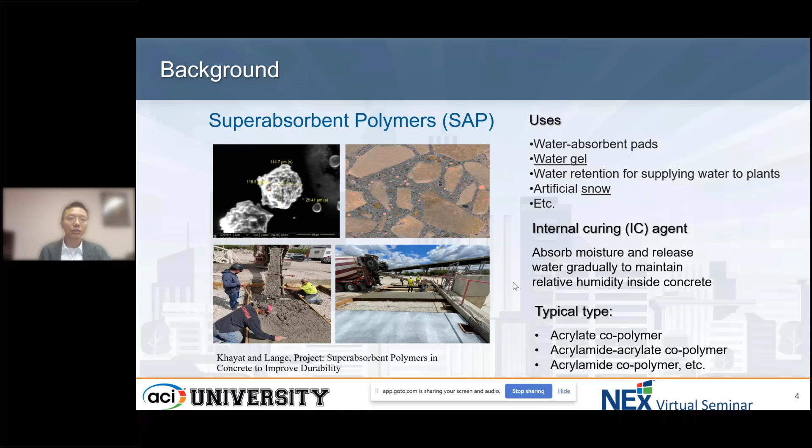Why do we use it in concrete? Because it can be used in concrete as an internal curing agent. It absorbs moisture inside concrete when it is in fresh state and releases the water gradually to sustain the relative humidity inside the concrete when it gets hardened. In this way, it can significantly reduce the shrinkage of the concrete, and we all know the shrinkage of concrete is a very big problem. It induces cracking and thence reduces the strength and durability of the concrete.

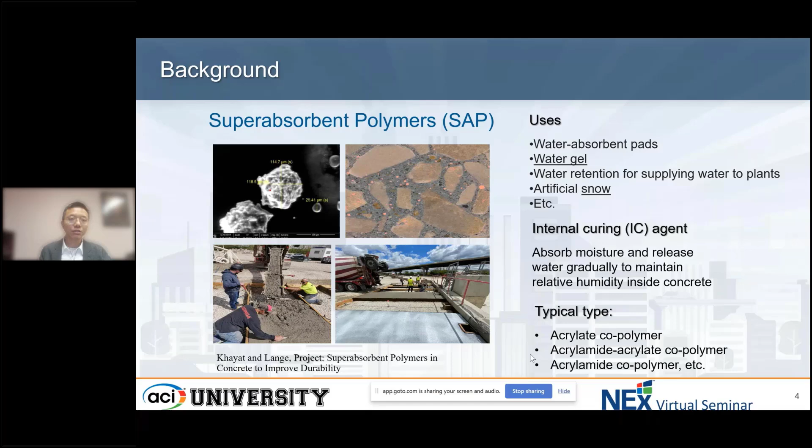This photo shows a project where we used SAP in pavement concrete, and it did a good job reducing the shrinkage. So in the past 5 years, researchers started using SAP in 3D printing concrete. Why do we use it? Because for 3D concrete printing, it has a high volume of binder, it does not require formwork, and it also has a high surface-to-volume ratio of filament. So drying and cracking in 3D concrete printing is really a big problem, and it can lead to reduced transport properties and durability. So researchers started using SAP in 3D concrete printing to solve this problem.

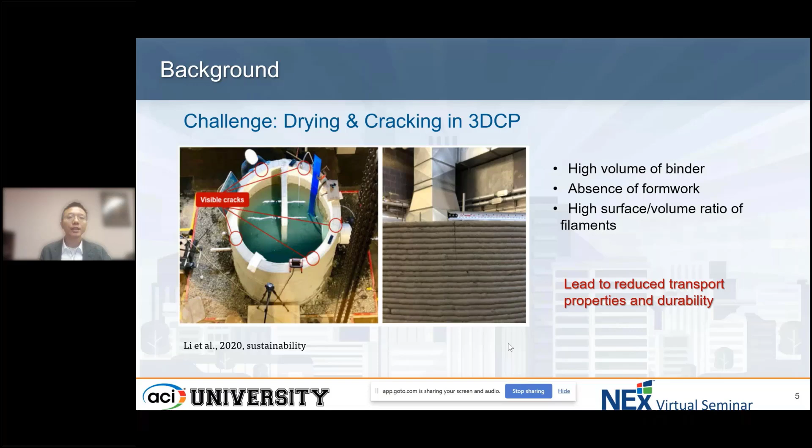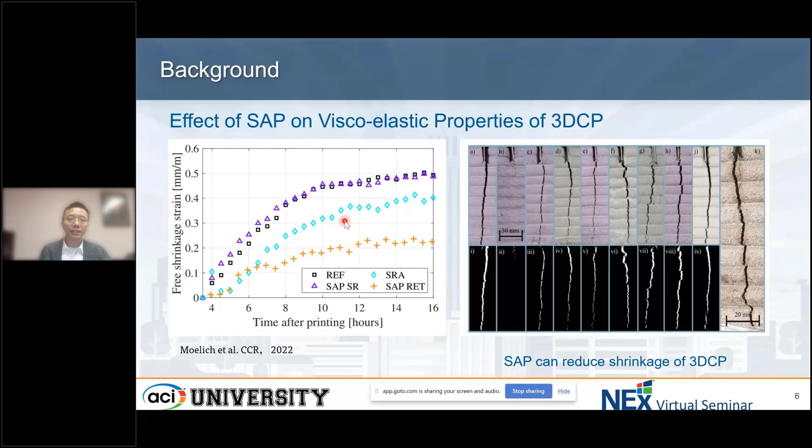But as it brings some advantages on reducing shrinkage, it also introduces a very big problem in 3D concrete printing. We all know that we need the printing concrete to be flowable when we pump it and when we extrude it, but after extruding the concrete, we need it to become hardened as soon as possible. As SAP absorbs and desorbs water during mixing, it definitely will affect the workability and rheological properties of concrete. So this became a big problem, and also a challenge, but a challenge usually means opportunity.

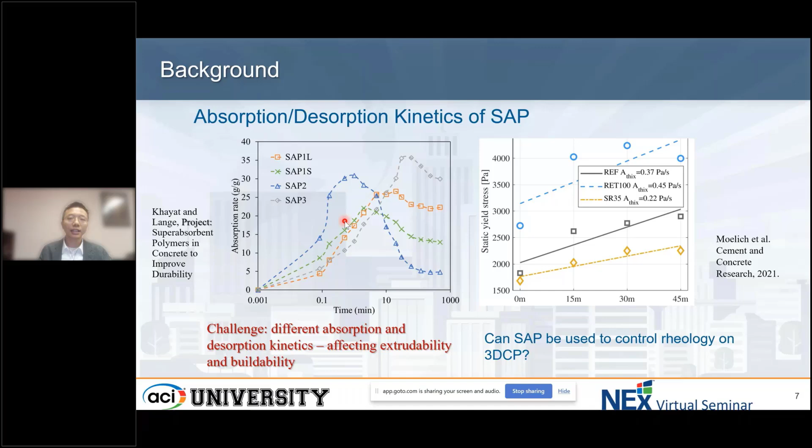Another idea in the recent 2 or 3 years is: can we use this characteristic of SAP to control the rheology in 3D concrete printing? Then I started my research in the last 2 or 3 years. We chose a couple of types of SAP. Today, I want to introduce two normal traditional types of SAP. SAP1 is the acrylic-co-acrylamide polymer with average particle size of 850 micrometers, and it represents the black line in this figure. This figure shows the absorption rate of SAP when it's saturated in the filtrate pore solution.

So initially, we can see that in 1 minute it absorbs 10 gram water, and then gradually absorbs water up to 1 hour, and then desorbs the water slowly.

And for SAP2, it is an acrylic polymer with average particle size of 500 micrometers. It represents the red one. It absorbs water very quickly in the first 3 minutes, but after that, it desorbs water also very rapidly, and in around 1 hour, 90% of water has been gone. So these two different types of SAP have a bit different absorption and desorption capacities.

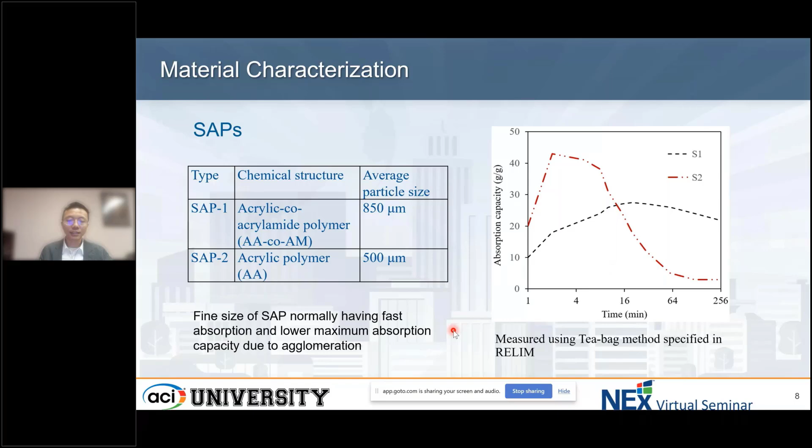And then we choose 3 different reference mixtures, and these reference mixtures are made without SAP. The reason why we choose these three reference mixtures is because this mixture shows different thixotropy.

We determine the thixotropy using 2 parameters. We measure the static yield stress at 5, 15, and 30 minutes, and then we determine the first parameter called floc value, which is the increase in yield stress after 5 minutes of rest. In this figure is this value. You see the floc, this value, and the Athix indicates the rate of structuration during the linear evolution. In our case, it is the structuration rate during 5 to 30 minutes.

And the second mixture, we here call it binder 2. It has a very high floc value and a medium Athix. And the third mixture, binder 3, has both low floc value and low Athix.

And we choose this measure because we want to investigate the effect of SAP on the mixture with different thixotropy.

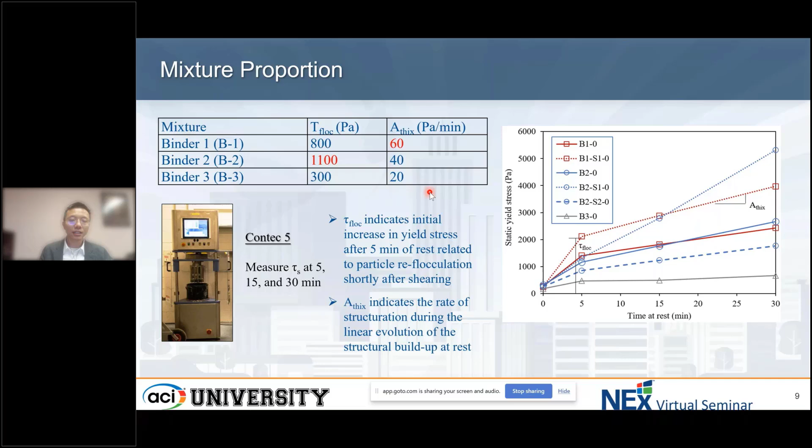We use the additional water only for SAP1, because SAP1 gradually absorbs water and does not dissolve water. And we use different superplasticizer content to maintain the initial slump flow, so all the mixtures have the same slump flow, around 190.

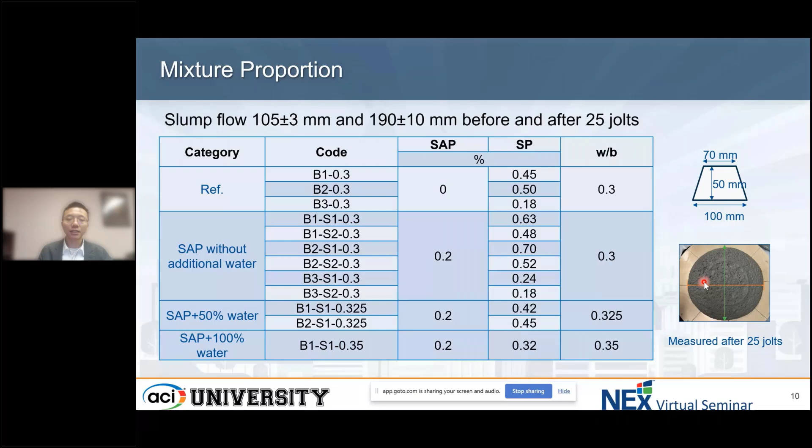Before and after 25 jolts, we use the mini-cone flow table test to measure the workability. And then we measure the basic rheological properties, the dynamic yield stress and the plastic viscosity. Based on the literature review, we come up with a printable region of the dynamic yield stress and plastic viscosity, and all of our mixtures can fall in this printable region. It means that at least for the first layer, we can print this mixture.

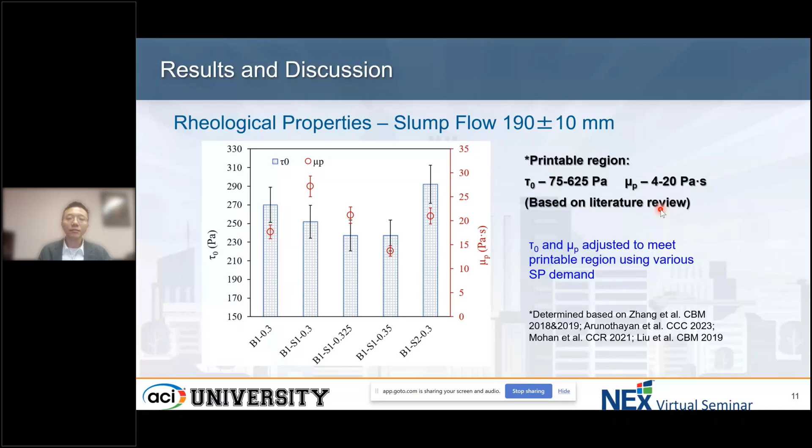And then this is the effect of SAP on binder 2, which has high flock and medium Athix. In this case, SAP1 also, without increasing water binder ratio, led to 40% higher flock value—very high, 1,800 Pascal is really high—and also resulted in higher Athix. But SAP2 reduced the flock by around 25%.

And why do we measure these rheological properties and thixotropy? Because these properties are closely related to the printability of concrete. And then I would like to correlate these properties to the actual print quality.

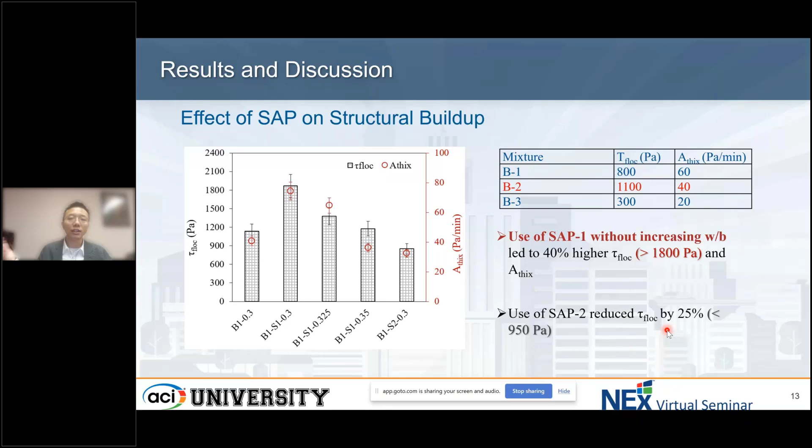So we used a gantry-type 3D concrete printer. The nozzle diameter is 30 millimeters, and it has printing speeds. We set up the printing speed at 50 millimeters per second—it's pretty fast—and the filament size, the print filament width is around 48 millimeters, and the height is 15 millimeters. We do not stagger time between layers.

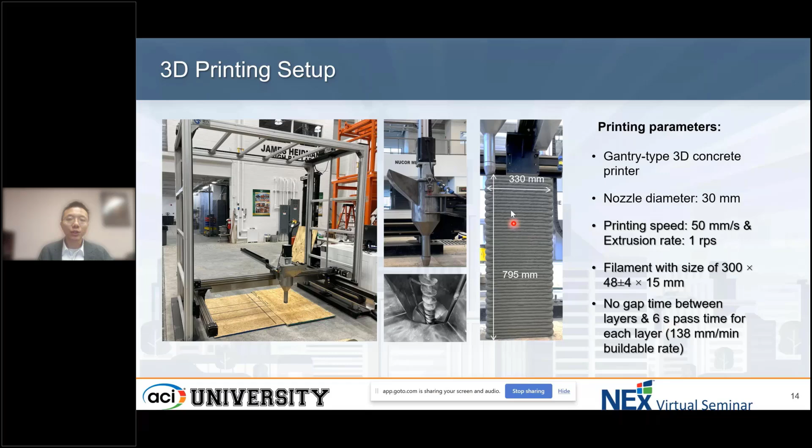And the vertical buildable rate is pretty high too, around 138 millimeters per minute, so it's around 8 meters per hour. And then we print the mixture until it gets failure. We just print a single layer, as this figure shows here, with around 330 millimeters long.

And I will show two videos. The first video is when plastic collapse happened and the bottom layer deformed, so the failure happened, and we record the maximum buildable height. And the second one is elastic buckling.

Because we print a single layer, when elastic buckling happens, it means it has very good thixotropy property. And in this case, the bottom layer still can sustain its shape.

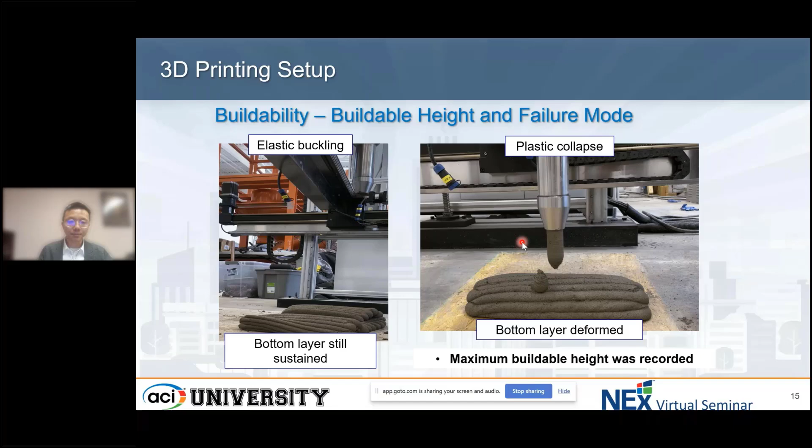Then, first we go to investigate the effect of SAP on the printability. We evaluate the printability based on the surface quality. This is the binder 2 with the very high flocculation value.

We can see the reference mixture made without SAP has many tears and open voids on the surface, even though these tears and voids are small, not very big. But as we add SAP2, it can desorb water rapidly and also reduce the flocculation value. We got a beautiful surface, just with very few tears on the upper layers.

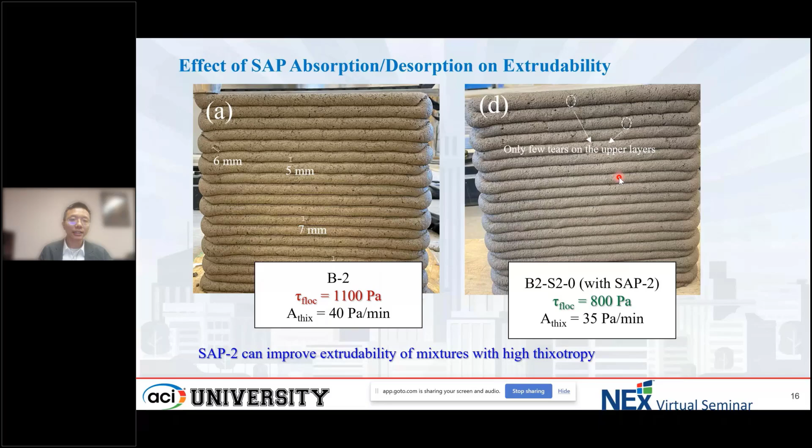Another case is binder 1. Binder 1 has a medium flocculation value, so it has a relatively smooth surface. But as we continue to add SAP2, it has a perfect surface without tears, as the photos show. So we can conclude that the use of SAP2 can improve the printability of mixtures with high or medium thixotropy.

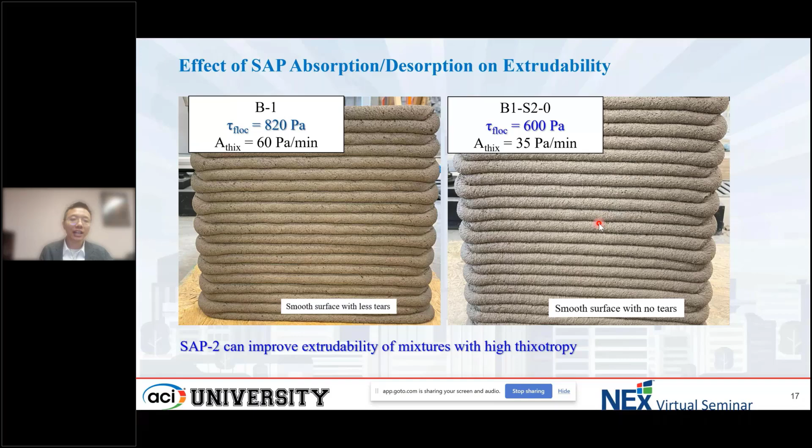But how about the effect of SAP1? It keeps absorbing water gradually. Figure A is still the reference mixture.

When we add SAP1, it increases the flocculation value and also significantly increases the Athix, from 60 Pascal per minute to 160 Pascal per minute. We still got a very good surface quality, just with a little bit more tears, but the width of the filament becomes narrower as we keep printing. At this layer we cannot print anymore because the width is just 25 millimeters. So it affects the printability.

But as we increase the water binder ratio to 0.35, it has the same quality as the reference mixture.

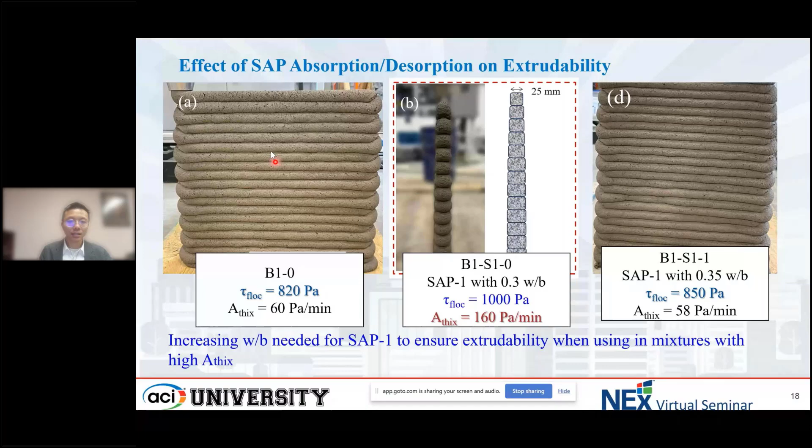This is the effect of SAP1 on binder 1. Because it increased the flocculation value to a very high level, we can see significant tears on the surface. The tears happen completely through the cross section, so we cannot continuously print the structure.

When we increase the water binder ratio, it becomes better, similar to the property of the reference mixture. So we conclude that increasing the water binder ratio is needed when using SAP1, in order to ensure good printability.

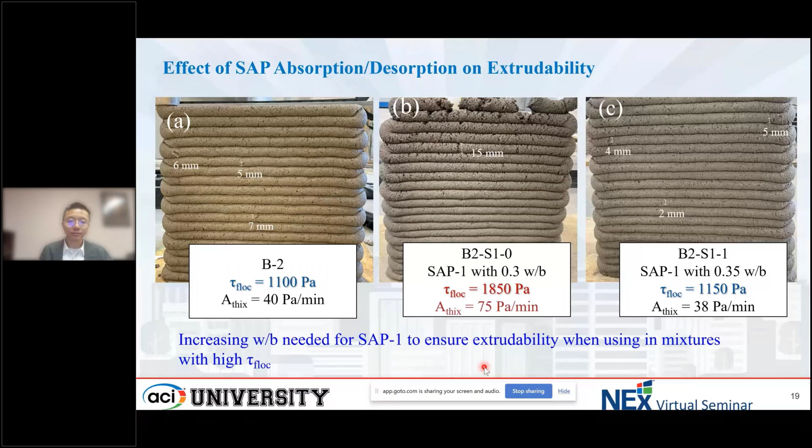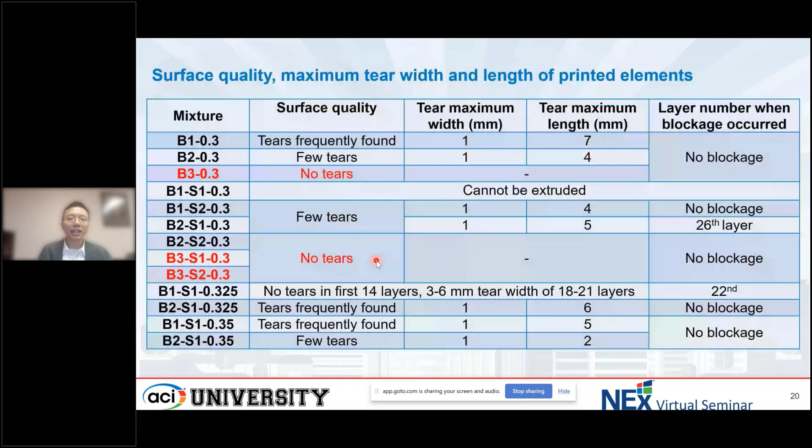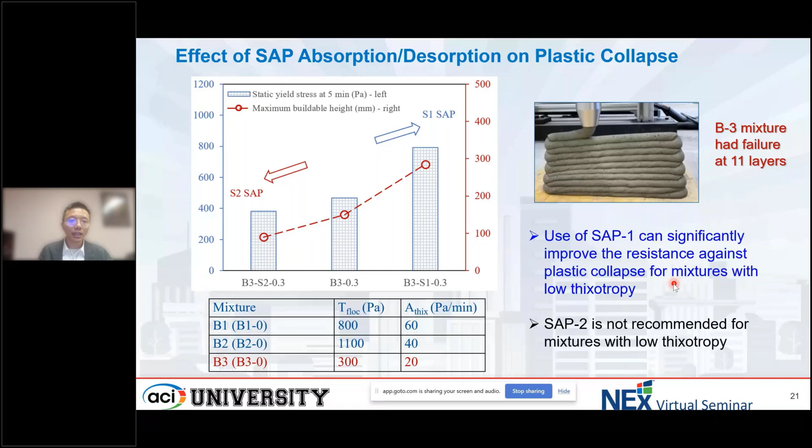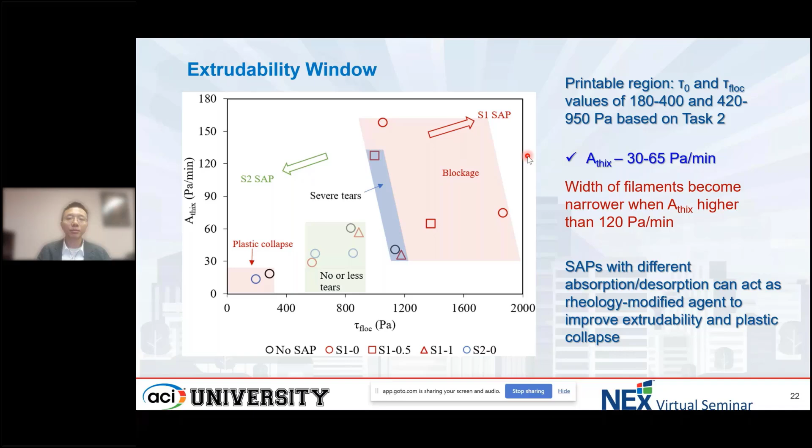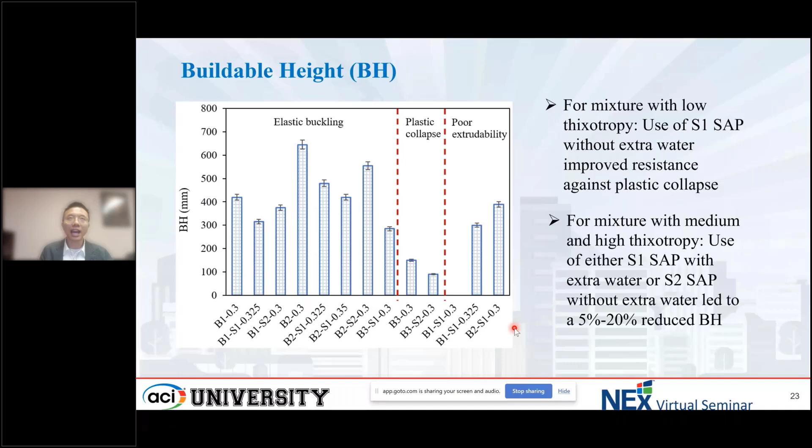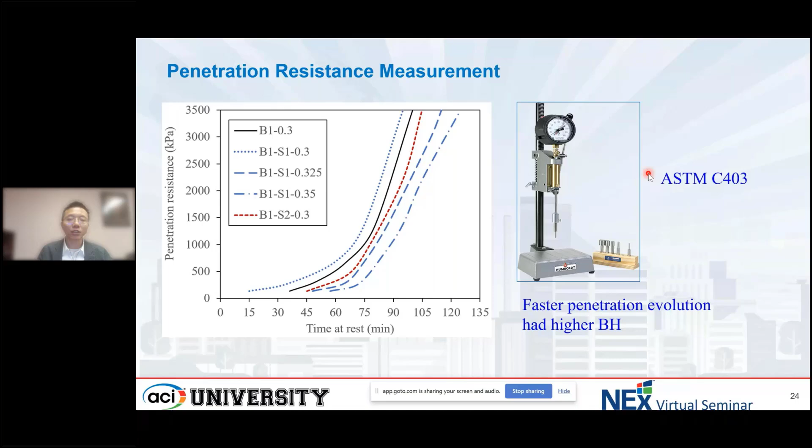In our case, we measure the evolution of the penetration resistance since it is at very early age, and then we develop some process parameters to indicate the capacity of the mixture against elastic buckling.

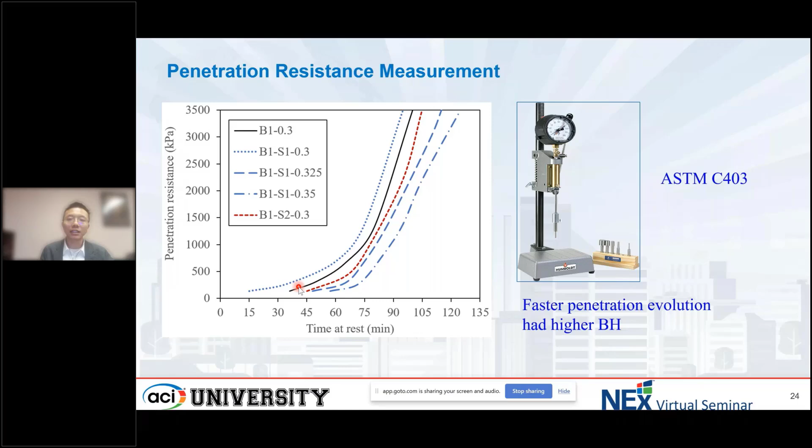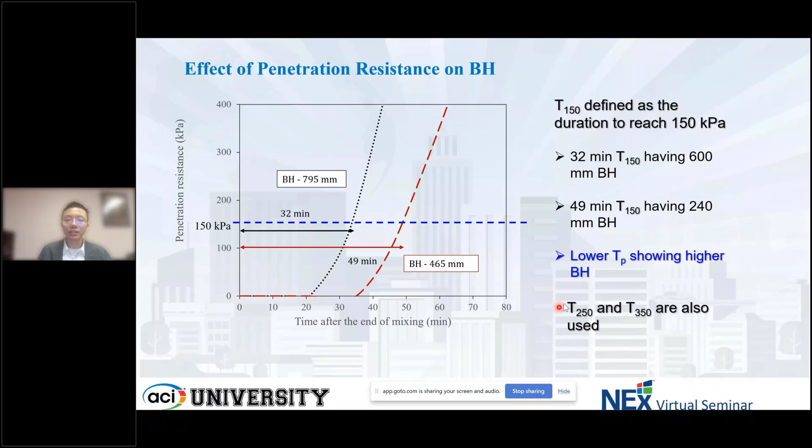So we develop a processing parameter called the time to achieve a certain value of penetration resistance. For example, T150 is defined as the duration to reach 150 kilopascals, and normally a lower value corresponds to a higher buildable height. We also measure T250 and T350, and we got these relationships.

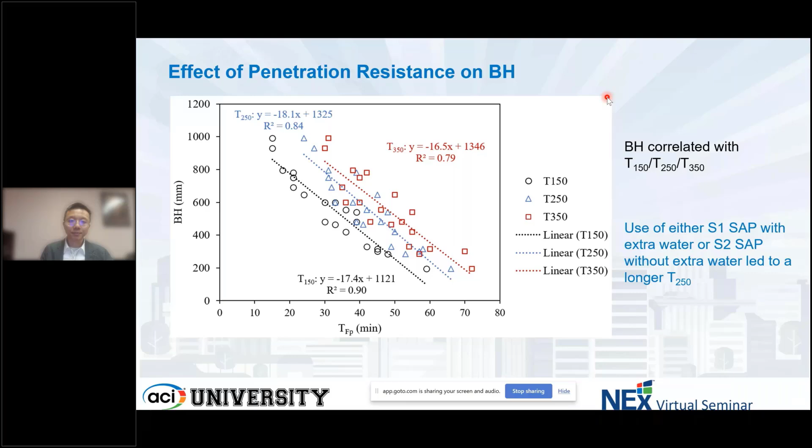So as it reduces the buildable height, another question is why we use SAP. Because buildability is also another important factor—that's why, as I mentioned, the answer is it improves the extrudability, which is also very important as I described earlier. It improves the surface quality of the filaments, and it improves the interlayer bond between layers, resulting in better strength.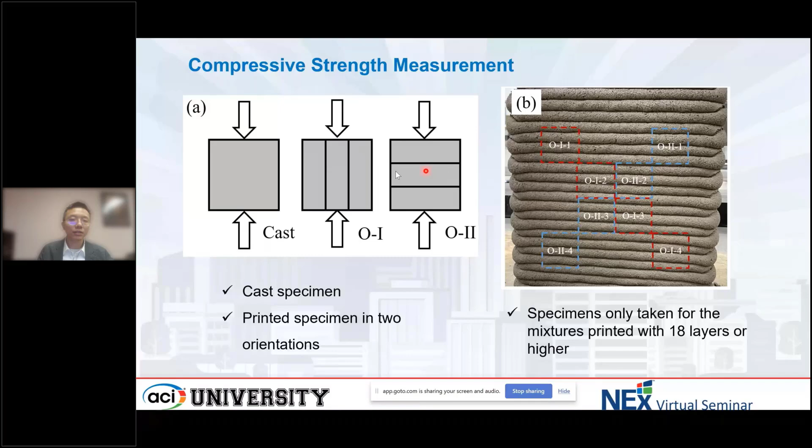This slide shows the result of the cast sample. When we add SAP without additional water, it can increase the strength around 10%—not very significantly—because of its internal curing effect.

As we increase the water-to-binder ratio higher, there's a little bit of reduction. Overall, the compressive strength of mixtures made without SAP and with SAP are very similar.

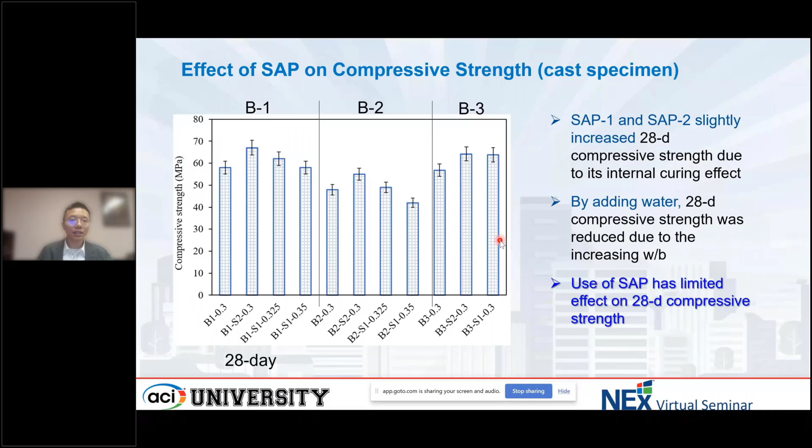But how about the compressive strength of the print specimen? We compare the compressive strength between the cast and print specimen, and we calculate the reduction as a percentage.

We can see from this figure the reduction of compressive strength is pretty high for the reference mixture. The blue column means orientation 1, the orange column means orientation 2. For orientation 2, it comes up to around 58% reduction of compressive strength for binder 1, and this is really a lot.

It means our strength of the specimen is around 6,000 psi, but we only got 3,000 psi for the print sample. Why did this happen? Because we got very poor bond strength and bond performance, and also poor surface quality.

As we add SAP2 to the mixture, we can show these compared to the reference: the reduction of compressive strength between the cast and print specimens decreases a lot. This is another advantage of using SAP2.

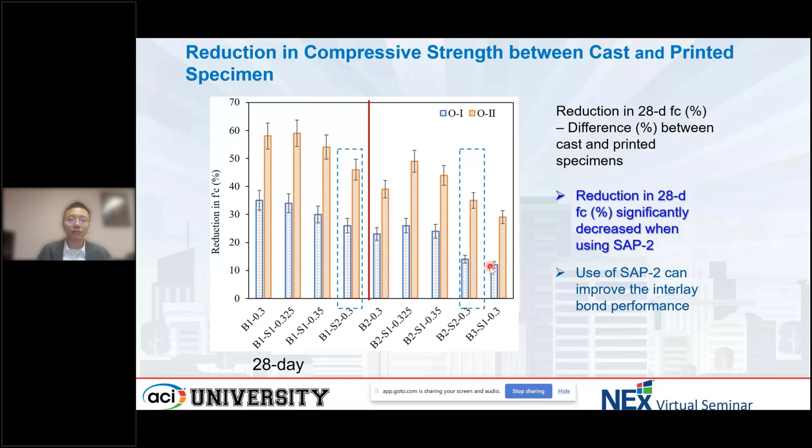It improves the surface quality, it also improves the bond performance, and it increases the compressive strength of the print filament.

This figure shows the relation of flocculation to the reduction in 28-day compressive strength. As I mentioned earlier, SAP2 reduces the floc value while SAP1 increases the floc value. We found there is a strong relationship between the floc value and the reduction in 28-day compressive strength.

That's why SAP2 can improve the compressive strength—it reduces the floc, improves the surface quality, and improves the bond strength.

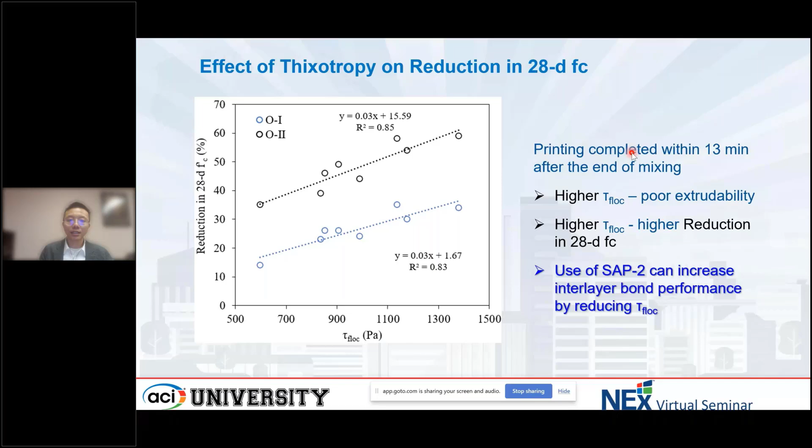And so overall, we have these key findings based on our research. The acrylic SAP, which we call SAP2 here, can be used to improve extrudability for mixtures with high thixotropy. And the use of the acrylic co-acrylamide SAP can be used for mixtures made with low thixotropy to improve the resistance against plastic collapse. Additional water is recommended for this type of SAP if used in mixtures made with high thixotropy.

And then the compressive strength is also dependent on the floc value. But I want to clarify this, why it is related to the floc value in our case, because we print the structure within 13 minutes after mixing. And the floc value is also measured during this region, so it's more closely related to this floc value.

We published this result in these references, so you can go for further details in these two references.

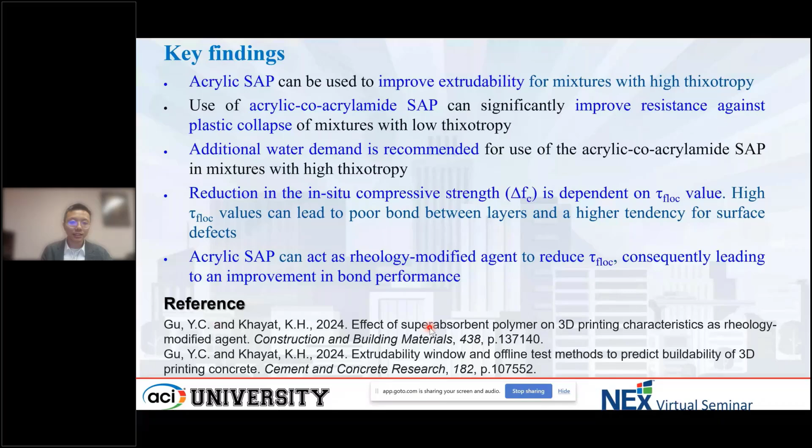It looks like there is a lot of research going on regarding the use of SAP and the bond behavior. So with this, we can go with the questions.

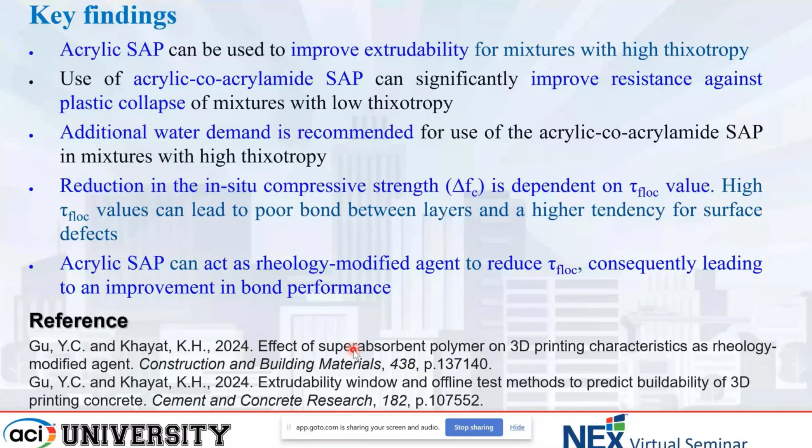So one of the questions we have is how thixotropy affects the interlayer bond of 3D concrete printing, and also does SAP also affect the structure build-up rate? Okay.

We developed the thixotropy into two parameters in our case. The floc represents the initial 5 minutes, and the Athix represent a later stage during 5 minutes to 30 minutes. I do think it is really closely related to the printing process, your setup of printing. In some papers, it also indicates the bond performance is closely related to the Athix.

In our case, it is more closely related to the floc value because, as I mentioned, we complete the printing process very quickly after mixing. And if you go to a larger application, it might be more closely related to the Athix.

That's how the thixotropy works. Also, if you have a high thixotropy, normally it will reduce the bond performance. So it does not mean that because we hope the 3D concrete printing has very good buildability, we need a higher and higher thixotropy. We need to have a good thixotropy to ensure it has good buildability and also good bond performance. That's how thixotropy affects the bond performance.